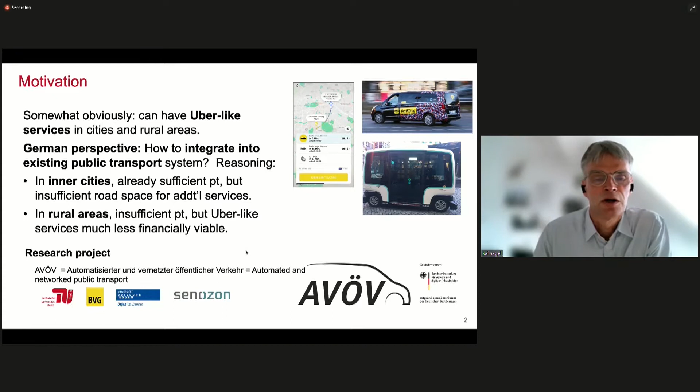So what I'm trying to do: I will explain a little bit how we simulate ride sharing. It's kind of ride sharing, or DRT, demand responsive transit, or robotaxi, or sometimes taxi, or autonomous vehicle - I usually mean the same thing. Autonomous vehicle doesn't mean it's privately owned, which is evidently an option, but it means it's owned by some kind of fleet operator who's using it.

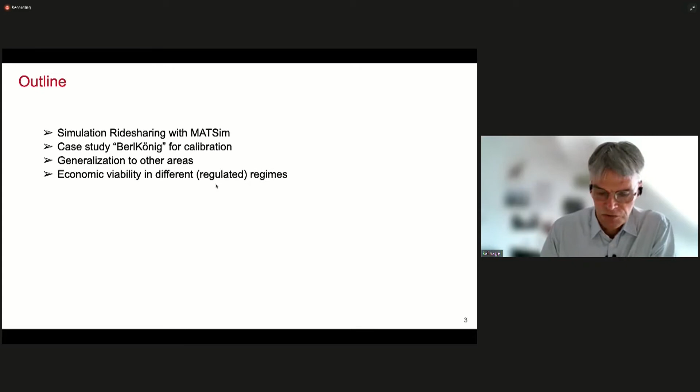I will very shortly say something about a case study we use for calibration. Unfortunately, the real world data there is not open, so there's not a lot you can learn except that we try to calibrate it. Then I will generalize to other areas - one very rural, and one the Berlin city area - and we'll see the results start to differentiate quite a lot. Then I will say a little bit about economic viability in different regulated regimes. So that's the plan.

This is MATSIM, which was also mentioned by Itzhak. It's an attempt to simulate traffic in regions microscopically. Microscopic means we have travelers microscopic, but also vehicles microscopic, links, traffic signals, and things like that. If you've ever done activity-based modeling, this is kind of the upper level of it. What this does is take the activity-based travel plan and put it down on the ground to see if it actually works, because it might not work—for example, it could get stuck in congestion, or maybe it tries to use a shared bicycle, but the bicycle isn't available. So it's really trying to simulate these microscopic aspects.

So it's dynamic, whole day, time dependent, with time dependent congestion. It uses activity chains. We try to do all modes, and we have facilities to teleport modes we can't really implement—so we don't just cut them out, we have the full days including all the modes that are there. It's meant to be large scale, which sometimes means cutting corners at certain levels of detail.

It's modular—we have plugins for taxis, for congestion pricing, road pricing, for emissions, noise, and many others. And the whole thing is open source, as Itzhak said, and this is the place where it is on GitHub.

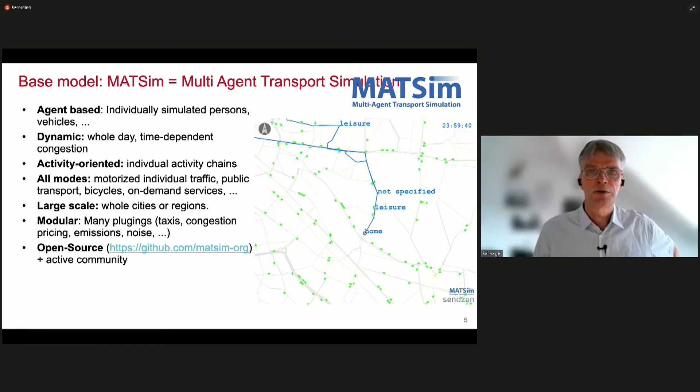What we do is take this stuff and put it into the simulation you've just seen. Then we give each of these plans a score, and it depends where you come from—in transport, this would usually be a utility, a utility function. It's a bit similar to what you have in discrete choice models, but it's a 24-hour utility function. If you go to labor economics or Jara-Díaz, you see very similar things. But in discrete choice modeling it's usually a bit different, because it's only a partial utility function.

So you get this, and in other areas you might call it a fitness function, if you're in evolutionary computation. You take this thing, then do plans modification and plan selection—in evolutionary computation that's something like mutation, or selection of the fittest, which is actually usually survival of the non-fittest being removed. And then it just keeps going around: they keep modifying these plans, trying to get higher scores.

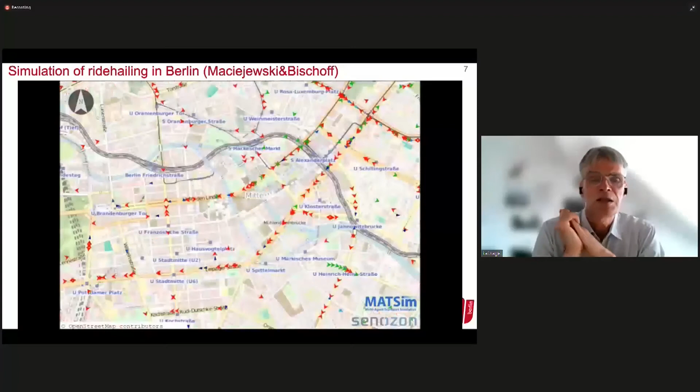In terms of DRT, I said we do this microscopically, and I mean that—we take all of Berlin. The scenario has 5 million people. We usually run 10% samples to make this quicker, but we can actually run it up to 100%. You end up with these kinds of simulations, where the red vehicles are vehicles with passengers and the green vehicles are vehicles without passengers.

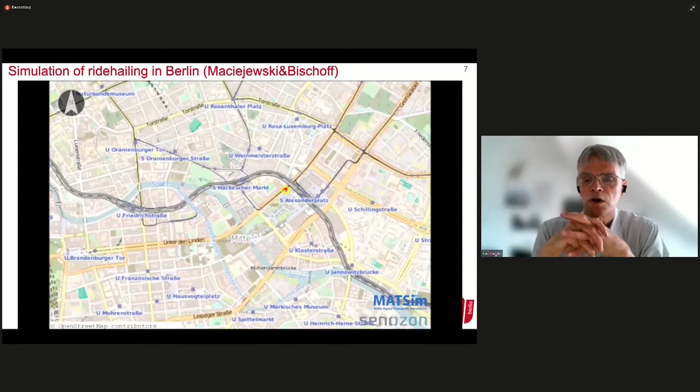And here you have a vehicle, and what it evidently does is with a passenger drives to a place, drops off the passenger, then has an empty drive to the next pickup location, and then has a passenger on board and drives that to the next destination. By that, you actually get a mechanical microscopic model of DRT.

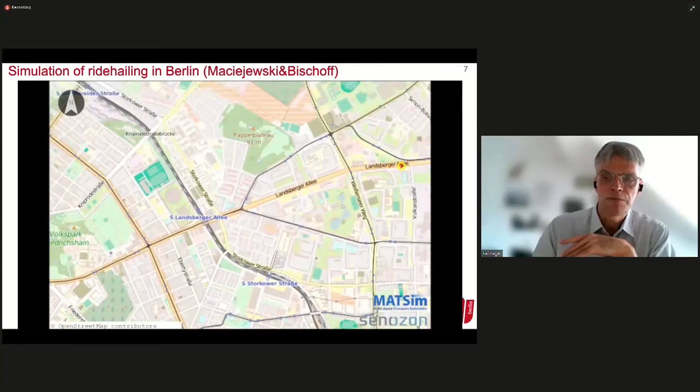I will say a little bit about pooling next. Right now that was single passenger. So what you evidently need is the service area where these things are actually running. You need initial positions of the fleet in the morning. You need to set the configuration. Do you want virtual stops, or do you go door to door? Do you do rebalancing during the day when the balance is off? What is your fare structure and all that? This talk will mostly be about fares.

So this is roughly door to door, so in some sense link to link. There's one virtual stop per link. I will mostly talk about the fares, and I will not actually do a lot for the other things.

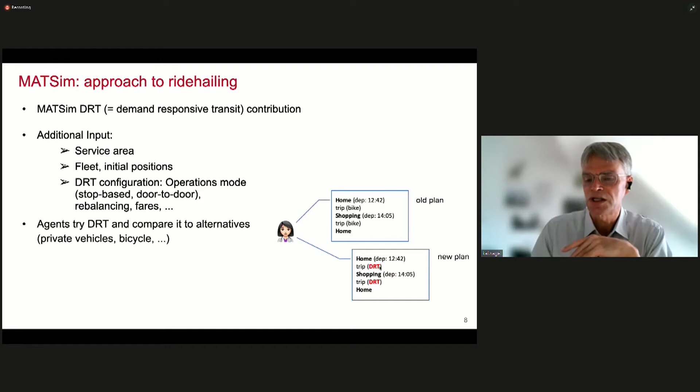People try this and compare it. So what happens is synthetic persons have this score, this plan, and then they just replace the trip mode by some other mode and see if that fits into their schedule.

Now, in terms of ride hailing, there's this additional problem. The structure is just like that: they walk to the street or to the stop, they request a trip, which is where there's room for improvement. You could pre-order this thing, but in this case they just go there and wait. Then the vehicle needs to be dispatched, which is a separate algorithm. The passenger is picked up, then there might be additional DRT passenger pickups and drop-offs, and eventually you're dropped off, and then you walk to your trip destination.

You see that this is actually pretty microscopic. So if you make virtual stops, then the trip to the virtual stop and from the virtual stop to the final destination is part of the simulation. And then evidently there needs to be a dispatch algorithm which somehow decides which of these vehicles goes there.

Those of you who have tried this know that single passenger taxi dispatch is actually much cheaper than pooling. Pooling means multiple passengers in the same car at the same time, so you have to be a bit careful. Sharing means, in our language, that they use the taxi sequentially, one after the other, but pooling means multiple passengers in the same vehicle at the same time. And then you need to kind of insert this everywhere, so this is pretty expensive. I could talk about that, but I will not.

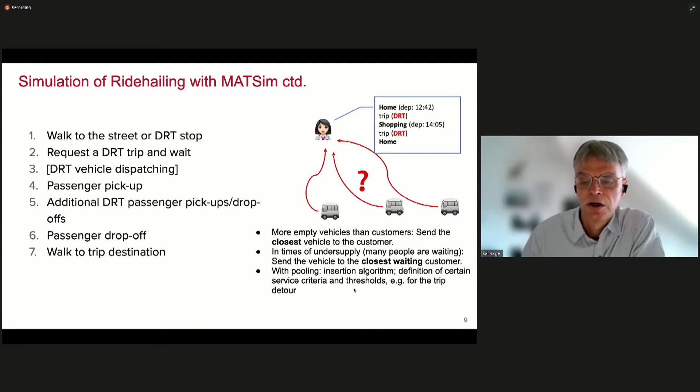And then it's somehow working. What comes out evidently in terms of our simulation is something like this: you have a vehicle and it goes there, then it has a stop. Unfortunately this doesn't tell if it's a pickup or a drop-off, but maybe we can imagine that all of these are pickups, and then now we're here. And then maybe this down here is a drop-off, and maybe the next stop is a pickup, and they start running around, and essentially if everything works well, they're never empty.

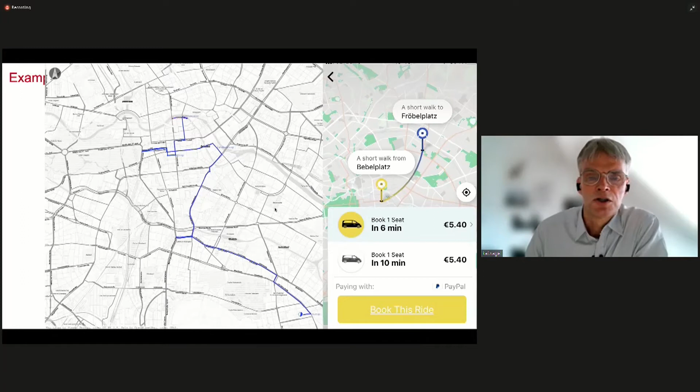And then evidently this is the user interface I have shown you. So this is the technology. The question is now about the fleet size, what size of fleet you need.

I don't think this is a final solution, but this is what we have used in this project, that we essentially say there's a decision variable. And the way this works, and this is why it had this somewhat weird title, is that we take the perspective of a regulated system. So we say we have a service area.

Inside this service area, we set a quality requirement. And the quality requirement in this case is, for example, that 90% of the waiting times for the vehicle need to be less than a certain amount of time. So what the operator needs to do is increase the fleet or maybe find a more clever rebalancing algorithm in order to serve at that level, at least for the regular day we're simulating here. And so then we have this loop where they try to reach this, and then they adjust the DRT service parameters, which mostly is the fleet size, and it just keeps doing this again.

So we have a fleet size, then we have people ordering the service. They have a certain wait time. Because of the wait time, they may like this or not.

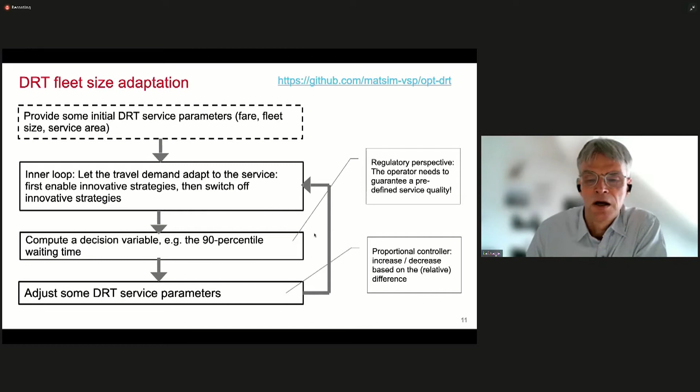And then in the end, the operator has to adjust this thing. So you get this bi-level setup where the inner loop is the behavioral loop and the outer loop is the operator loop. Now, if you look at results, I think this becomes quickly relatively clear what happens.

I mean, evidently, this has to do with rebalancing. And in this case, the rebalancing doesn't seem to be optimal. One can probably improve this.

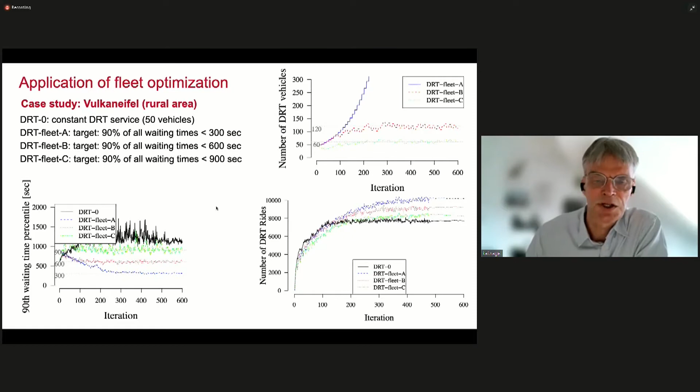And if you distribute them equally, uniformly, it usually works pretty well in cities, but it doesn't work in rural areas, because in rural areas you probably want to have 1 or 2 or 3 vehicles in the middle of the village, and then that's it. And if they are all used, then you actually want to send other ones in there. And that is not fully working yet.

So based on that, the idea is now that we simulate this thing in Berlin. As I said, this will be very quick here because the data is not open. And then I will actually go to other places, and hopefully, at least I think I learned a lot, and maybe you will as well.

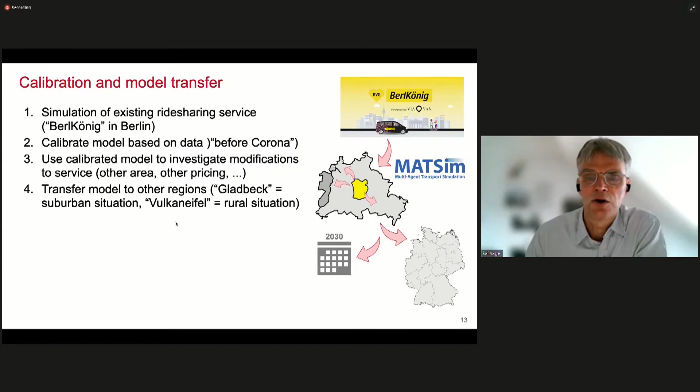So this is, as I said, very quickly: what we have is an area in the center of the city, which is this thing here. It's kind of the eastern part of the inner city. It's a door-to-door service. It uses pooling, so multiple passengers per vehicle. All of this is still pre-corona in terms of calibration. And we use this dynamic adaptation of fleet size.

This talk doesn't have it in there, but it actually shows it in part. This is pretty important, to not replace too many walk and bicycle trips — you have like a minimum fare that's relatively steep in order to deter those people.

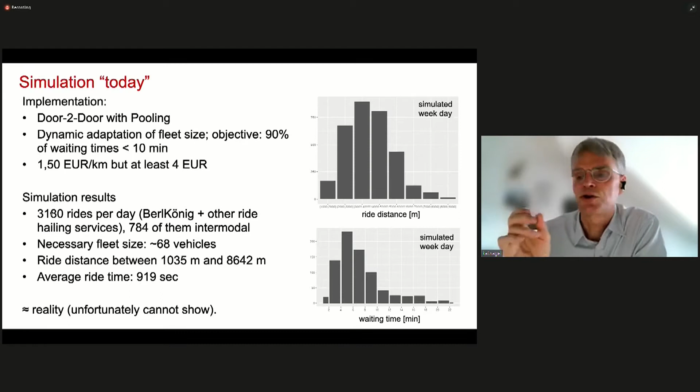And then we have where the pickups cluster. All of this we can actually compare to the real data, and we can at least say it's reasonable, so the structure of this is reasonable. The other thing is getting this number right, because it's just a certain share of all the trips, actually pretty small, so we at least have some idea that this is not totally stupid.

Now let's assume that we believe that, and go to some other places. It really depends what you want to do, because one thing we try to do—I don't know if you can see the chat, but I will put it in there. Can I send to everybody? Panelists and attendees. Yeah, okay.

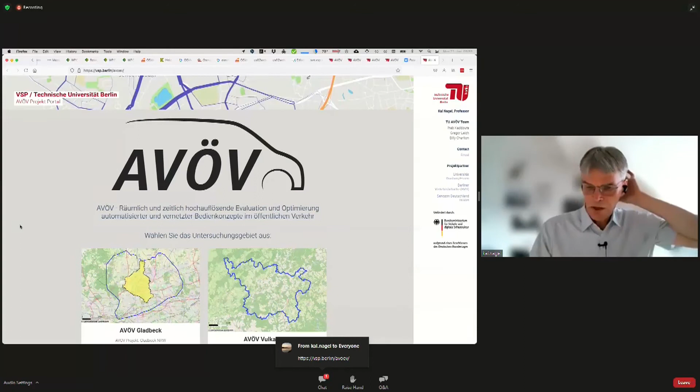So this is now in the chat, if you'd rather play around with it, that's fine with me. We're trying to make these results accessible, and this has gone to stakeholder meetings, but for many stakeholders that might still be way too technical. At least those with some technology experience, in particular the PT operators in these areas, have actually taken this up and started using it. So this might be a way to go.

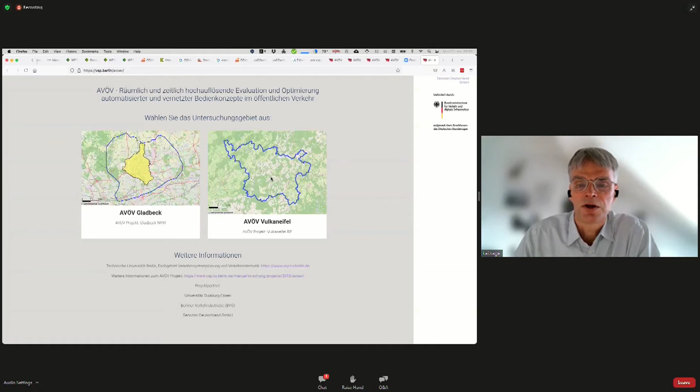Essentially you can go on the area—this is the Vulkaneifel thing, I'll talk about this a little later. This is now in German because it's oriented towards a German audience, but you have this 'Express-AVÖV,' which just means an express version of this, which has to do with regulations. Just ignore the 'express,' but it's easy to remember if you want to find the same thing.

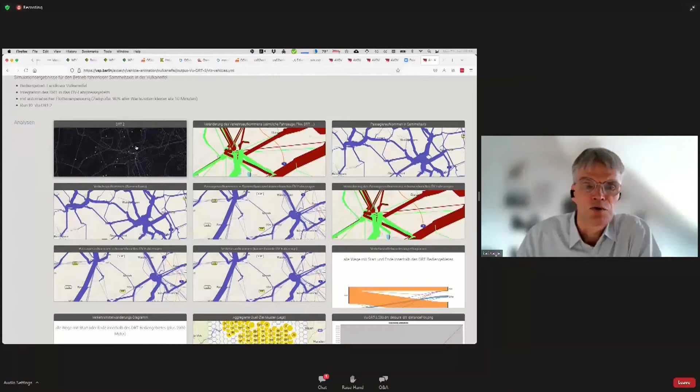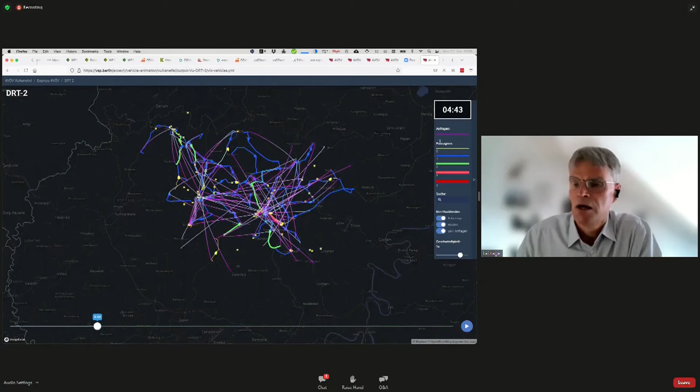And then you can actually have these fun things with simulations—you can start having moving pictures, see the actual paths they go, and the requests in this whole thing. You can actually see how it develops over time: requests come in, and at some point vehicles pick up the requests and drive them to the destination, with numbers of passengers and all that. This is actually relatively useful to get some idea of what's going on.

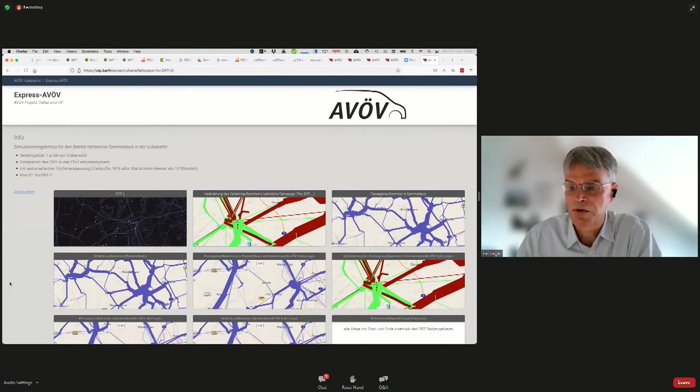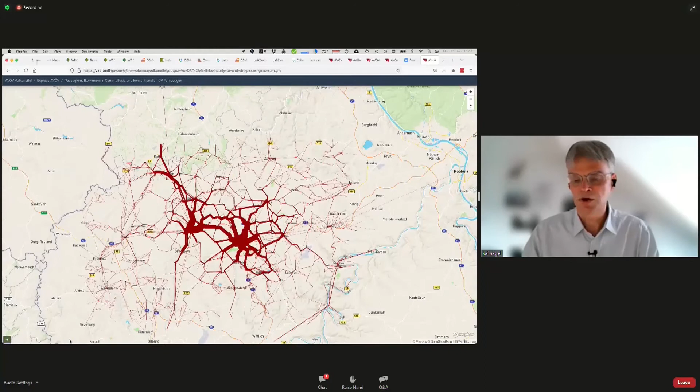And then the other thing which is interesting—there's lots of plots here, but one we have is the number of passengers along links in this new service plus the conventional public transport. And then you get something like this, and evidently there's all these things you can do, but that's not the main point I want to make. Let me move this to the right and have the other to the left.

On the left is the public transport system as it is right now in terms of usage. On the right is how it would be if we had a certain type of DRT service. So for the rural areas, this is in some sense like an explosion—you get a totally different public transport system.

This here is the regional train. The reason there's a thicker line is because it's the train line that goes to the nearest big city. The main village in this area, Daun, doesn't have a train connection, so there's still relatively large demand between Gerolstein and Daun. There's also relatively large demand between Daun and Ulmen, but if you look at the little villages, really nothing happens.

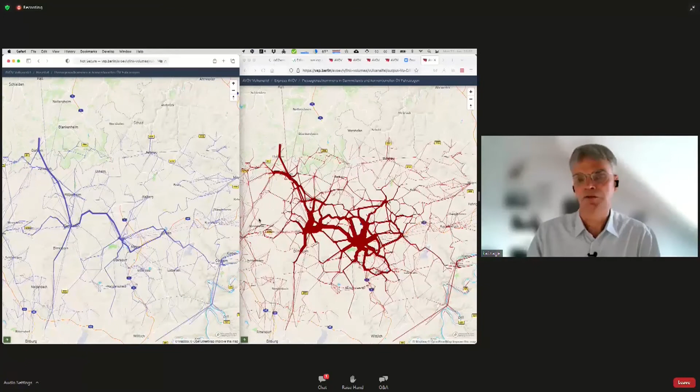Whereas here you suddenly see that this whole system is really reaching out into all these areas—lots and lots of usage of this thing. You also see they're actually driving this way because it's faster. Right now it goes here because it's stopping at more intermediate villages, but to get people fast from A to B, that's actually a bad option. You also see they are serving the train, but the train isn't gaining that much—that's kind of the other part of the story that might become important later.

The other thing you have to remember is that there are two different price structures. One is what I've already explained: 1.5 euro per kilometer, but with a 4 euro minimum fare. I'll usually call this today's prices, with human driver, but it's not that we try to make exact cost recovery. It's just an approximation, and you'll see how this plays out.

And then I say something with is future. What's happened here is that we just integrated this service into the regular public transit fare. So it's not something like 35 cents per kilometer, but rather there's already a public transport fare, and we say for the same amount of money, you can now actually use this new service, and we'll see where we end up.

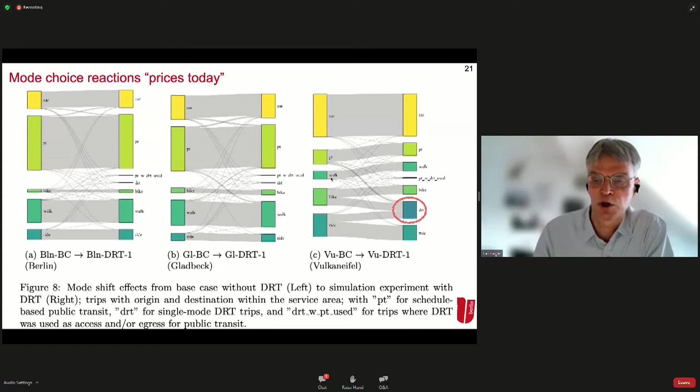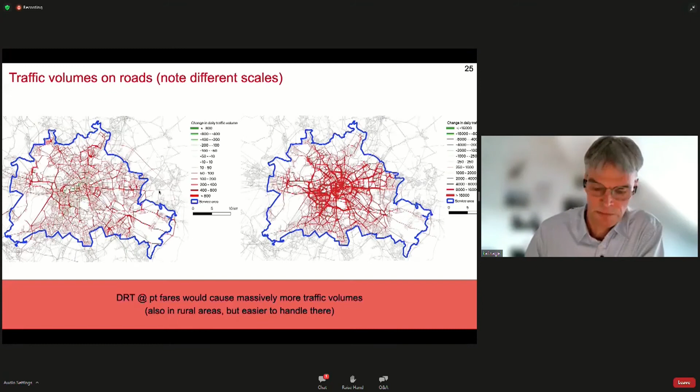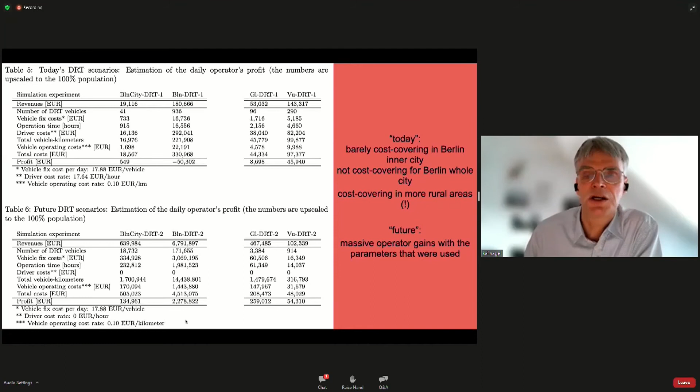So this is pretty much it. As I said, I start from regulated prices and regulated service requirement. The typical simulations you see, they can actually reject services - they say, okay, this is a trip I reject. These guys can't reject. They need to put in a sufficient number of vehicles to serve their area.

Urban versus rural is really vastly different in the results. If you do current prices, in urban situations the users want to be in outskirts, but the operators want to be in the center. And in rural, according to our simulations, it would already be profitable today. Somehow they are not making the move. I can't really say why. Maybe our computations are completely wrong, but I think it also has to do with needing to say, okay, right now they have taxi service and conventional bus. You need to get rid of taxi service, get rid of conventional bus, and replace them by these new services for this whole thing to make sense. And this is actually hard to do.

Future prices I have talked about - road capacity totally overwhelmed in urban, but in rural I think it will be okay. And then we have huge operator gains everywhere, given that pricing regime. Now, there's two challenges in Germany. One is for rural, how to organize the transition. What's happening right now is they're negotiating conventional contracts that will sit there for 10 years. So we will have conventional buses run around for the next 10 years, although we already have the technology to move on. We're way too slow, I think.

And in urban, the thing is we need to figure out how to allocate the road capacity. Maybe you just think about a city toll, and that would be a good solution - we see this also in simulations. However, the Germans are averse to these kind of market-oriented schemes, so there needs to be something else. And quite in general, right now the city jurisdictions have no jurisdiction to restrict road usage. So even if your city is completely congested and nobody can move, the cities can't do anything. It needs to be the national government. And the national government essentially says, oops, if somebody can make money, we don't care. So we have this two-level problem, and we have a real problem getting our hands into these things.